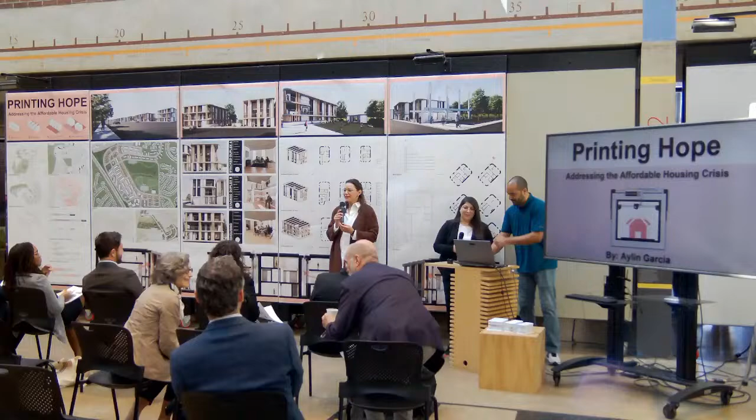We're going to kick off our very first Master of Architecture thesis presentation. We'll be in this room the whole time, flipping between this side and that side. The third student for the morning is on the back of that panel, so once we rotate, we'll be on that side for two presentations. And we're going to introduce our jury. We'll have you guys introduce yourselves because you know better than I do. And then we'll pass it over and kick it off. Does anyone have any questions about the process of the day?

The only, I guess, unexpected component is that Aylin's chair, Marcus, is on Zoom. So at the very end, we'll have a Zoom interlude from Marcus on Zoom. So do you mind starting introducing yourself?

Thank you. Hi, I'm Catherine Anderson. I am a faculty at George Washington University Interior Architecture Design Program. Yes, I'm here actually with my colleague, Stephanie Travis. Hi, I'm Stephanie Travis. I'm program head of interior architecture at GW, and I'm very happy to be here. We've been here for a couple of things over the years and have some friends that are professors, so I'm excited to see the work.

My name is Michael Marshall. I'm an architect in Washington, D.C., have a firm there, and I've been coming to University of Maryland since, I think, 1996. You were here. Yes, for quite a while, and the key professor 1 year. Very excited to see the work. Hi, everyone. I'm Dana McKinney-White. I'm an assistant professor of urban design at the Harvard GSD, and I started my teaching career here at Maryland, so I'm glad to be back.

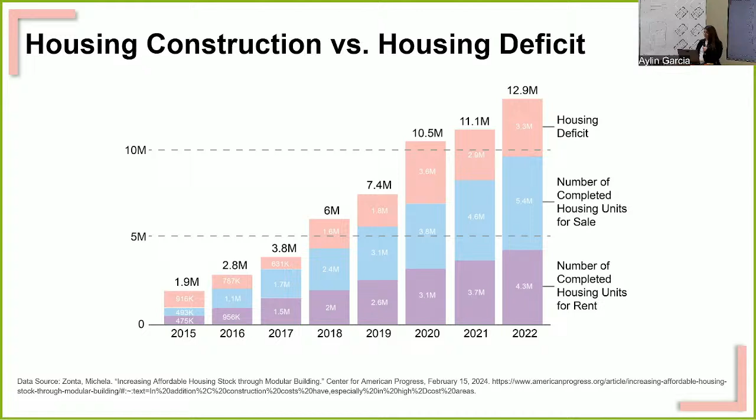This housing shortage has led to an increase in home pricing, creating a decrease in home ownership. Another negative effect is that it creates a burden on renting units, and the government isn't able to assist all the residents in need of affordable housing. Providing affordable housing is a key to reducing intergenerational poverty and increasing economic mobility.

The average time to produce a new residential unit has increased over time, proving that there is a need for another approach to the construction process. The average time it takes to construct one unit is about 10 months; 2 to 19 units, 19 months; and 20 units or more, 21 months.

So for further analysis, looking at the time frame for different construction phases of a single-family 2,500 square foot home, we can see that the construction process phase that takes the longest is the core and shell, due to all the disciplines being involved and relying on one another to move the construction forward.

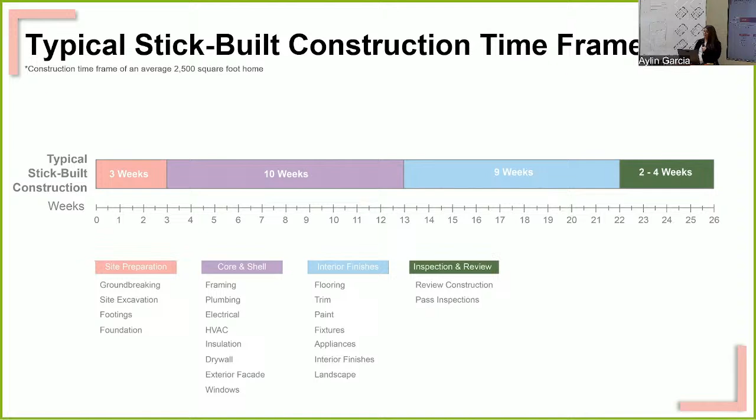But if we look towards 3D printing construction, everything has been coordinated during the core and shell construction. The time frame is reduced significantly to less than a week. So that would help eliminate 9 weeks in the construction process.

Not only is it cheaper to build, but it's also cheaper to operate. From an analysis of the units designed, that will be covered later in the presentation, the EUI of the units allowed for a decrease of 70% of the operation costs, relieving its residents from being cost burdened.

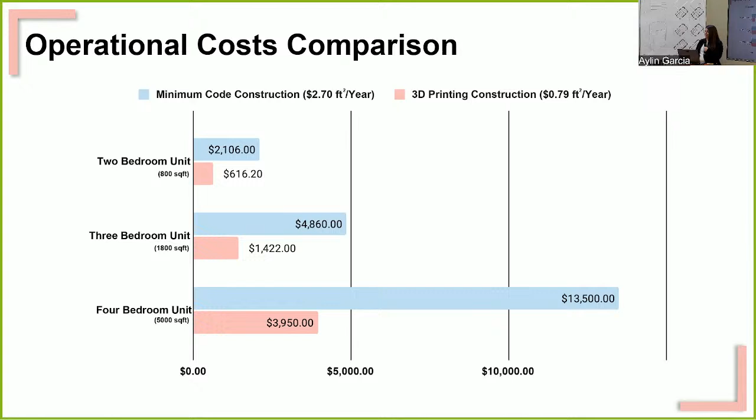So the limits of the current technology are that it requires a 4-foot spacing around the construction of a home, and it's currently only able to print up to 3 stories, but it's still new and it's still advancing to larger sizes.

So the way the 3D printer starts the construction is by pouring the foundation. Then 3 layers of concrete walls are printed together, allowing space for plumbing and electrical to be placed between the walls. And then before placing the precast concrete roof, the walls would be infilled with insulation.

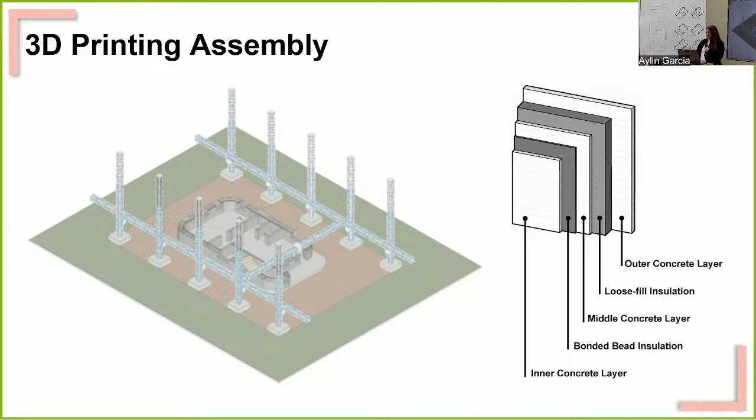Some ways in which 3D printing construction is elevating the standards is by creating resiliency against fires and floods. It has increased strength and lifespan by being able to withstand up to 8.0 magnitude earthquakes. It has a tight building envelope due to the 3 concrete layers and the insulation infilling the layers.

It is very environmentally friendly because the concrete is created with green cement, which reduces emissions by 99%. Finally, it increases natural daylight by having access to windows on all sides of the print due to the constraint.

So this site is located in Greenbelt, Maryland. It's very close to Washington, D.C. and College Park. It is a city that has been growing with a lot of opportunity and is projecting growth over the years. So that's one of the reasons why I chose the site.

But a major reason is because in 1937, Greenbelt was created as one of the first 3 green cities during the New Deal, in which it looked towards new construction methods to keep up with the housing demand. The development consisted of modern modular construction, also found within historic Greenbelt.

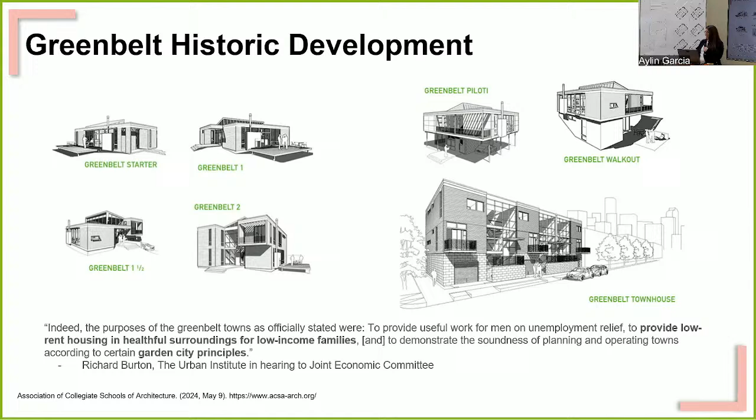Within historic Greenbelt, there's also an Art Deco style, which helps blend nicely with the curves of the 3D printing construction. This was some of the inspiration that led to the contemporary design of the construction. And then these are some values that were created for green cities, which were used for inspiration when designing the spaces, specifically creating connected communities and housing for all.

So as we zoom in to Greenbelt, the city is divided mainly by the highway, which creates a division of sub-communities. On the plan, we can see the site is located in Greenbelt East, and Old Greenbelt is located north of the site, which contains the historic district. To further study how the original development attempted to create a green city, a further analysis is created of the historic district.

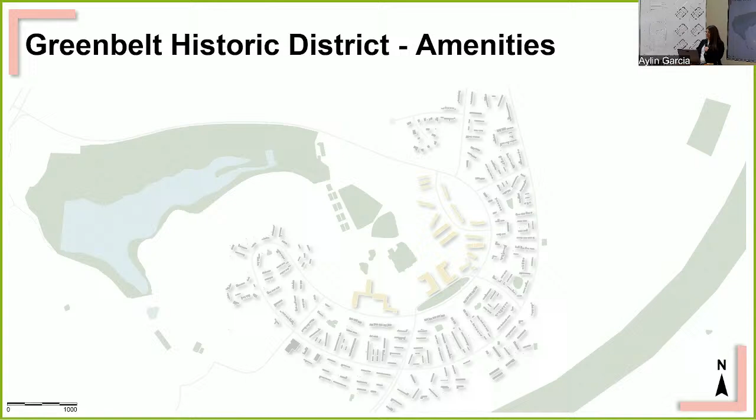So the site is divided into these large super blocks, which are surrounded by all the amenities at the center of the site. The reason for creating the super block was to limit road access and increase pedestrian access, so having an interconnected woven system.

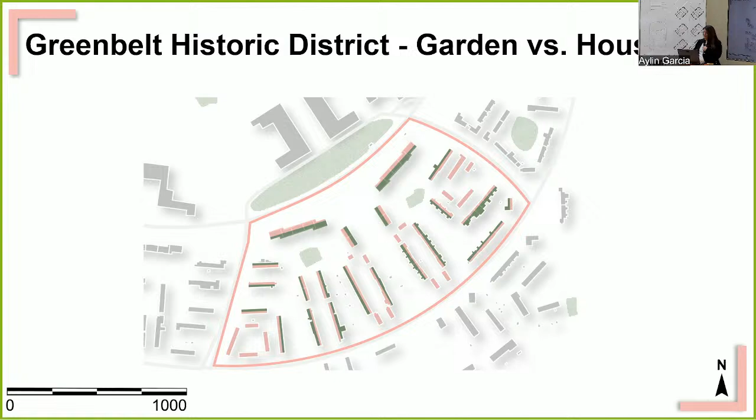And then if we see more of the block, we can see that the housing is divided by an entry side and a garden side. The only issue is that the privacy created between the units is very limited, only having privacy at the garage entrances. So it is also very difficult to implement this type of block sizing into other suburban development areas.

My site is located in Greenbelt East. The site is surrounded by the highway. It is mostly residential with a central park where the community has generated its own community garden. So the community is already looking for more community spaces, as the closest recreational center is located in Old Greenbelt, and the only way to access it is either a 40-minute walk or a bus ride.

It has few amenities on site, which are located north of the park. Surrounding the park, the site was developed between the 1970s and 2010s. However, the development has created a very disconnected Greenbelt East, as some developers have even fenced off the areas of housing, and the ideas of the historic district of creating a connected community are lost.

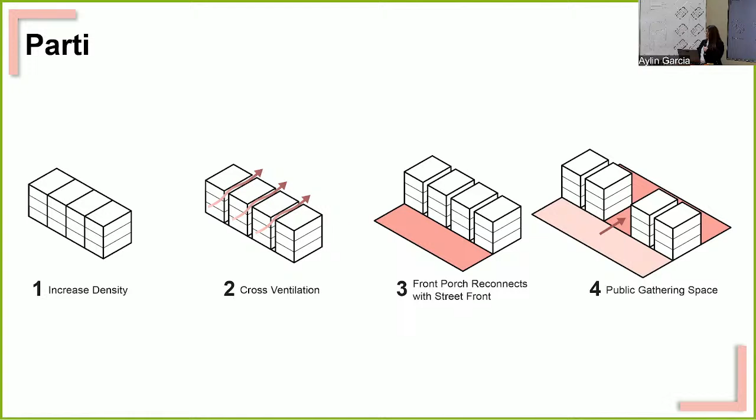To help mitigate this, the first step would be increasing density to create more affordable housing. Second, the 3D printer constraints would allow for more cross ventilation. Third, creating a more public front area that reconnects with the street front. And fourth, creating more community public gathering spaces that don't sacrifice the privacy of its users.

Along the main route within Greenbelt East, there would be a development that reconnects the street with the existing residential buildings while giving back to the community more green spaces and community flexible spaces. There is now a new ring road that wraps around the park, similar to the historic district, where there will be future development of a recreational center that anchors around the existing residential housing.

The development would be divided into 2 phases, in which the first phase starts to reconnect the neighborhoods with new streets, incorporates a park, and continues to create a buffer from the highway. It includes 16 co-housing units and 50 stacked duplex units. The second phase continues reconnecting the streets, creates more housing, and includes a space for a recreational center. This phase has 14 co-housing units and 24 stacked duplex units.

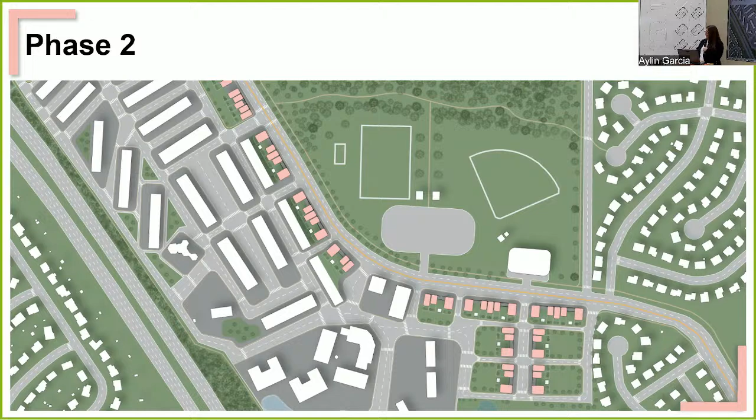So, welcome to the new Greenbelt East development, where there is housing for all, creating an improved green city that has more social opportunities and reconnects with nature. The street front contains new bus stops along the main road in East Greenbelt. All unit blocks have indoor and outdoor flexible spaces, which can be utilized for a makerspace, educational learning space, or recreational space.

The types of units found on site range from 1-bedroom to 3-bedroom and co-housing units. All units include a VRF system for cooling and radiant floors for heating. For the stacked duplexes, an owner would be able to rent the other unit to help decrease housing costs, relieving some of the cost burden of the users. These units also operate using solar panels, reducing cost of operations as stated earlier.

The first floors are 1-bedroom units for each, and for the smaller unit, the upper floors are 2 bedrooms, and for the larger units, it's 3 bedrooms. So the cost to create these units allows for the ability to create more space-friendly units compared to what is existing in the historic district.

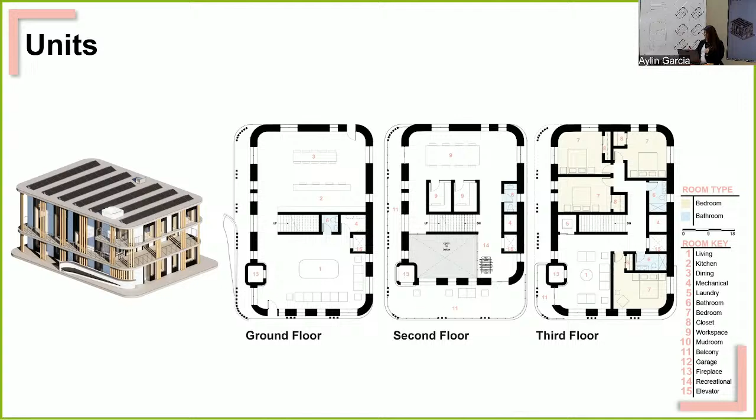So the disconnection between the units allows for more natural light to enter the units. It allows for the reduction in sound transmission, which was a major issue in historic Greenbelt, since the prefabricated homes allowed for a lot of sound transmission. And it allows for an increase of cross-air ventilation, reducing cooling costs.

And to conclude, I say, let's print hope to help create more possibilities for the American dream while creating a more resilient and sustainable future. Thank you for listening to my presentation, and now I open the floor to questions and comments.

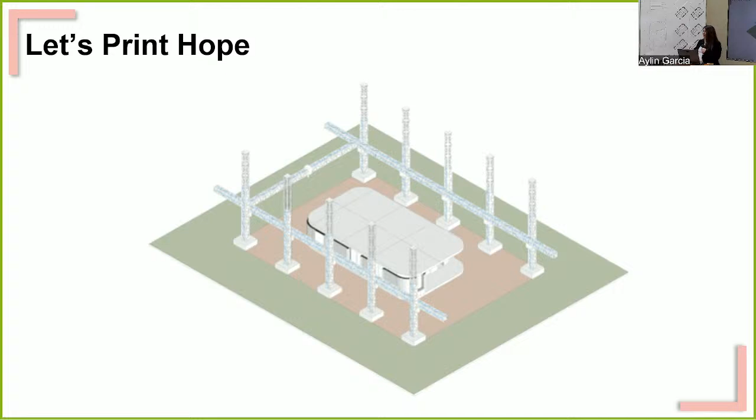Everyone can hear on Zoom. We'll use a mic to ask questions.

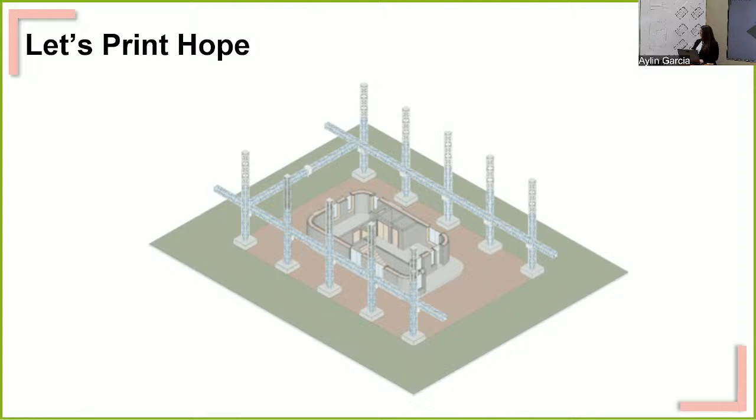Great layout and great presentation. Just a couple questions. The space in between the buildings.

It looks like it's maybe 4 or 5 feet. And so you think the air will be able to come and go through? Yes, so I looked at the air wind flow. And the direction, you mean? Yes, the direction. And since the units are angled, it's able to enter through the sides. Because it's so close together, why not have them touch?

What we call the zero lot line, and maybe wind chimneys or something. It just seems that you're going to have some privacy concerns if the window's open to get the air to go through. It also means acoustically, you'll be able to hear what's going on in your neighbor's house. Did you think about that?

Yes, I agree. The reason why I separated them was because of the 3D printing constraints. At first, I thought of joining them, but the constraint didn't allow for it. But I think as the technology furthers along, it has the possibility of joining those unit blocks and creating more dense unit blocks. Okay.

And you mentioned the difference between regular stick construction and this construction as far as operation. What's included when you look at the data to tell how one is better than the other? I used a software to analyze the sustainability aspect, and it compared the units with the R values and the solar panel production, and it has the standard of a typical stick built, and it compared it to what was being designed. Okay, so your comparison was really mechanical, electrical, plumbing, those things. Correct. Okay, thanks.

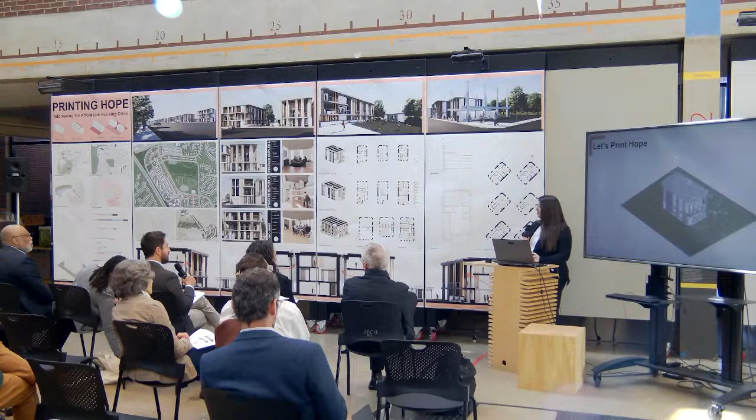Some negative aspects. I think the spacing requirements, like the level constraints, being able to use this technology maybe to even create multifamily developments could further the construction process. Another, I don't think there is another one, but some benefits would be that it reduces the risk of laborers being injured, so it actually helps decrease that risk. But there isn't too much currently since it's a new technology. Thank you.

Yes, thank you for your presentation. I like how you went from general, the urban aspect, down to the wall detail and the structure. I appreciated that a lot. So one of the things, just to pick up on what you just said, but I was thinking about it as you were going through your presentation. It is a new technology, so the time-saving aspect and therefore the economical advantage of these structures is also based on the fact that we need people that know how to construct them and fit them, right? Retrofit them after they've been printed.

How far along are we in that process? We're pretty far along. Even if people feared that this construction process would be eliminating jobs, this would also be generating more jobs because it would need more people to be specialized in using the technology. And even statistically, it's showing that 3D printing construction is going to probably increase by like 50% over the next 5 years.

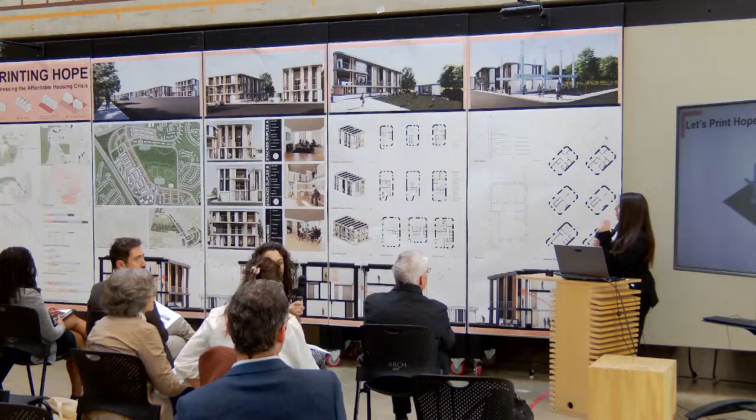I broke up the phases so the first phase would start with co-housing and duplexes, and the third block is mostly stacked duplexes. I think there's more development towards the top of the site and more movement, so it made more sense to start developing in that area. And then, to reduce stress put on residents, as the development would increase, it would start going towards the south of the site.

What in the printing process complicates the idea of having a shared wall between units? So for the printer to actually be set up, there is this 4 foot by 4 foot foundation where the scaffolding is placed. So that is what's not allowing that connection between the units. Yeah, but that foundation could be left buried. You need a foundation wall anyway, right? Footing, foundation.

Yeah, so I don't understand why it wouldn't work. So once that building would be done, it would still require that space for creating the next building. So it would still leave that 4 foot space for creating the next unit next to the existing one. Okay, well, I think there's a way around that, because this would have been a much more sustainable project if you didn't have to have two exterior walls 4 feet apart, where there could have just been the one wall. And so the construction of that other wall is taken away from the cost of the project.

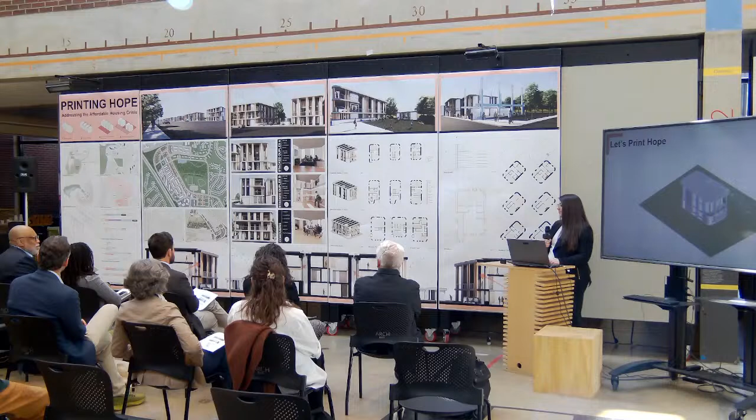Basically, the way row houses are built. So, well, that too. Yeah, that was a whole other issue. So that's just my question. There must be a way, I think, to do that. I think as the technology starts to increase the printing capabilities, it will be able to maybe print 2 to 3 units at a time. So that could help mitigate that aspect. Right. Okay.

I'm looking at that car. You're lucky if you get that one parking spot. But where does everybody else park if you don't have the unit with a garage? There would be street parking along the edge. Right now, currently, there is an extra lane, so it allows for that street parking. Yes, correct. Okay, because I wasn't sure if there's public transport. Along the main road, there's bus stops along the way, so there's 3D printed seating areas to allow for the bus stops.

Really great presentation. I can tell you focused a lot on the architecture and the 3D printing aspects, and it looks like a real resolved project. Not to harp on the 4 foot, 5 foot separation between the buildings, but I think you should also look into, and this maybe is a little too real, fire separation there as well. You've got pretty big openings facing each other. So looking at how to maintain this curved perimeter, but having that party wall just be the single wall between the units, I think would bring it to another level, because I really do like the Art Deco curves, and even the tones are really quite beautiful as a standalone. I think you can drop them into different contexts, and they'll work really nicely.

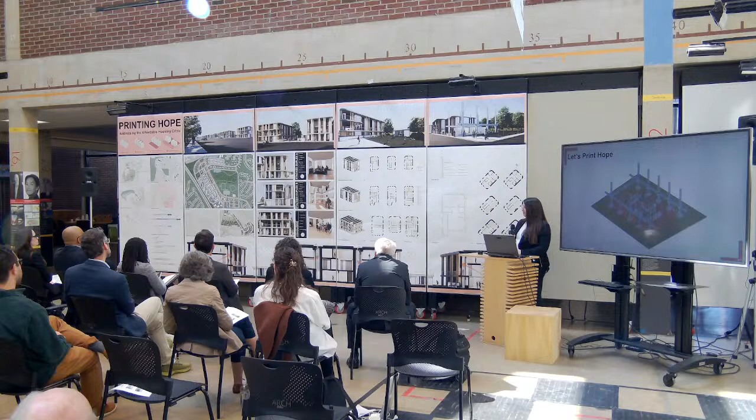I share the concerns about the snugness of the houses to one another. And I think one of the things that probably is true in a community like this is outdoor space for a house would be really important. And if some of the houses maybe were side yard entries where you came up the side yard and entered, it would have solved maybe some of the problems of the proximity issues.

But the project I keep thinking about looking at this is Corbu's project outside Bordeaux, France, when he tried to do mass production there, and the community, after living there for 5 or 10 years, started putting flower boxes on the outside of the houses, and somebody asked Corbu famously, Mr. Architect, they're altering the houses, they're customizing them, and he said, life is always right. We architects must learn from that. Which was, I think, an interesting commentary on how people customize things. So maybe that would be something you'd think about as you move forward in this.

And I think the comments that have been made about the orientation and how you might adapt things to different orientations make sense to me. I think the areas where I have the most concern are where the units back up to those long slab buildings there. They look very, very close there, and the privacy issues are really exacerbated there, I think.

I do think the taxonomy of the type, for it to be successful, as Leon Krier said once, in America, quantity is quality. In other words, if you can do a lot of something, it has great value in the marketplace, and production housing that gets done in America certainly shows us that, because they set up and do 50 houses, and bang, nobody bats an eye.

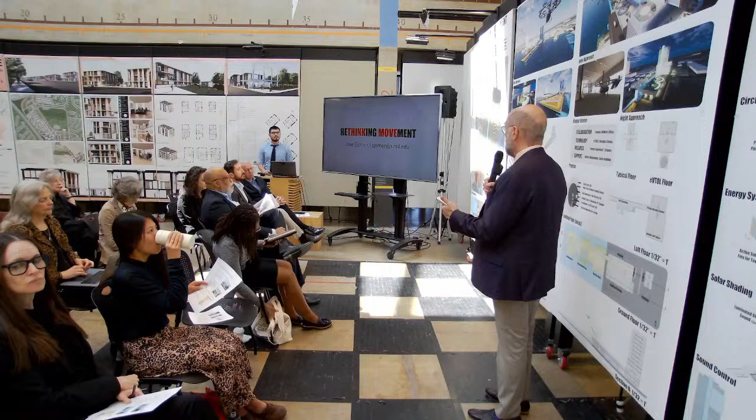All right. And thank you all for joining us. We are, by magic of eVTOL, about to be transported through the air to Baltimore. Jose's thesis chair was Jamie Tillman. The committee was myself and Brittany Williams. You are now clear for takeoff on pad 5. Thank you. Seatbelts? I'm glad to hear that you biked. I'll talk a little bit about that after.

But hi, everyone. My name is Jose Gomez, and I am presenting Rethinking Movement. Before I do present, I do want to give thanks to Professor Kelly and Professor Tillman for helping me throughout this process in taking this concept that doesn't exist into something that could potentially exist in the very near future. So yeah, my name is Jose Gomez, and I'm presenting Rethinking Movement.

In today's world, there's a lot of transportation problems, too many to list in one thesis presentation, but just a couple that are really important. Today, transportation accounts for over 28% of total carbon emissions across various sectors. We've seen since 2020, and even before that, an increasing rise in pedestrian accidents, either at crosswalks or automotive accidents as well. The statistics from 2011 to 2021, I believe the most recent, show over 70,000 accidents that are specifically pedestrian related at crossings.

Another major issue with the transportation realm at the moment is this push into the existing landscape. We're constantly seeing expanding highways and roads taking up natural landscape. These are not necessarily the best for the world we're currently living in. More recently, one of the major issues is the collapse of the Francis Scott Key Bridge. It has shown that current transportation networks are rather fragile, and they affect not just the infrastructure itself, but multiple sectors that depend on transportation to move goods and people.

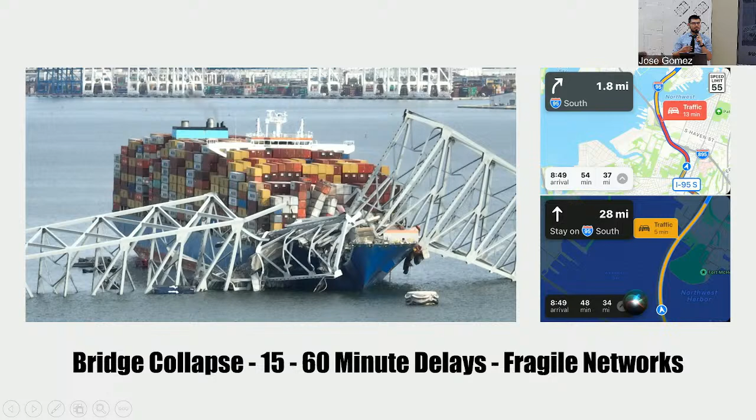I myself, and some of you might have experienced this yourself, specifically during rush hours, will find anywhere from 15 to 60 or more minutes added to your commute if you're traveling through the tunnels along I-95. And so this recent accident has really shown that another eye needs to be taken into account when looking at the transportation realm. So what if we start to change the way that we're looking at transportation? Today, there's a variety of new technologies starting to incorporate themselves into our current transportation networks.

Some of those include electric power. Multiple vehicles are starting to incorporate electric batteries as the main source for energy to move the vehicle instead of traditional fossil fuels. Aerial flight is one of the booming sectors in the world right now, where we're starting to see drones and eVTOLs, which stands for electric vertical takeoff and landing vehicles. Another term that you might have heard in the past is air taxis. It applies to those as well.

And more recent as well are new autonomous systems. These systems are designed to help automate these processes to take people from one place to another or goods from one place to another without the need of a person to actually move these vehicles. What if we take those technologies and incorporate them into a new mode that's faster to travel, that incorporates a brand new network and changes that experience?

Traditionally, as we've mentioned, the transportation realm is flooded with carbon emissions. It has almost this negative view that you might even experience when you go to a typical gas station. Our current transportation networks are limited to ground-based for the majority of our day-to-day lives, that being highway use, smaller roads, and even rail as well. But if we take all of those categories and change it a little bit to make our experience better, but not just the experience, our day-to-day lives better, it can create a new network that starts to incorporate this aerial technology and starts to populate new areas.

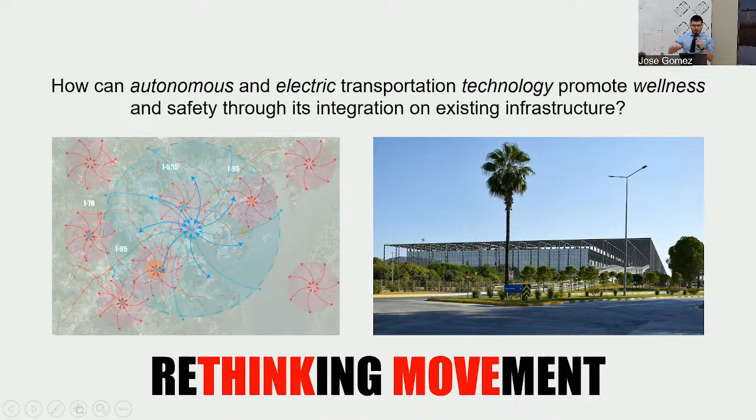And so the thesis question that I've been working with for this semester was, how can autonomous and electric transportation technology promote both wellness and safety through its integration on existing infrastructure? I mentioned that the eVTOLs, which are starting to appear nowadays, are electric powered, and they can carry both people and goods to any place that they can land. The advantages of these vehicles are, one, being electric powered, they don't have carbon emissions, and two, because they are not restricted by the traditional transportation networks, those being ground-based on a two-dimensional plane, they can move faster, more efficiently, and they can get to a place quicker, safer.

These vehicles are starting to appear as we're speaking now. They're continuously being developed by multiple companies, and we will be seeing these in the near future. In fact, there's this program called Innovate 28 that's created by the Federal Aviation Administration, which is the sole organization that's regulating the development of eVTOLs and this concept known as advanced air mobility, which incorporates both these eVTOLs as well as smaller drones and the general landscape of aerial vehicles for the future. Their goal is to have these vehicles up and running at facilities by 2028. So this technology is coming.

However, one of the things that they are missing at this point in time is an infrastructure to be able to accommodate them. In the way a bus has a bus station or a train has a train station, these eVTOLs need some kind of station to be able to operate, to be maintained and to serve as multiple stops and start to populate this new network. And so that introduces the vertiport concept, which is this new infrastructure that allows for a multimodal access point where one can transition from ground-based transportation into aerial-based transportation.

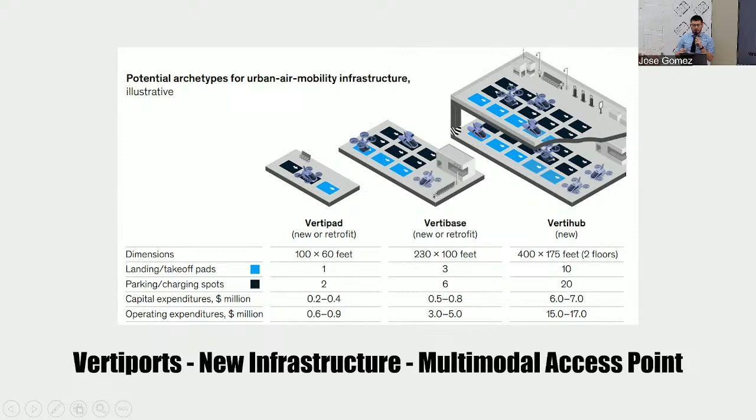And so as we zoom into the site that I have selected for this project, we see that the vertiport, in a sense, isn't necessarily new. Rather, it's the evolution of the current heliport. The site that I've selected is in Canton, Baltimore, specifically the industrial site. You can see this site right before you go into the tunnels. It's called the Pier 7 heliport, which can be accessed directly from I-95 as well as through the Chesapeake Bay. This site currently serves as a heliport. The pier that extends out into the water can hold up to 7 helicopters for deployment.

However, the entire area being an industrial site has very little public realm to it. Granted, it is for the industry to work. However, it's missing a little piece of public appeal. And so I present today the Baltimore Vertiport, which is an evolution of this existing heliport.

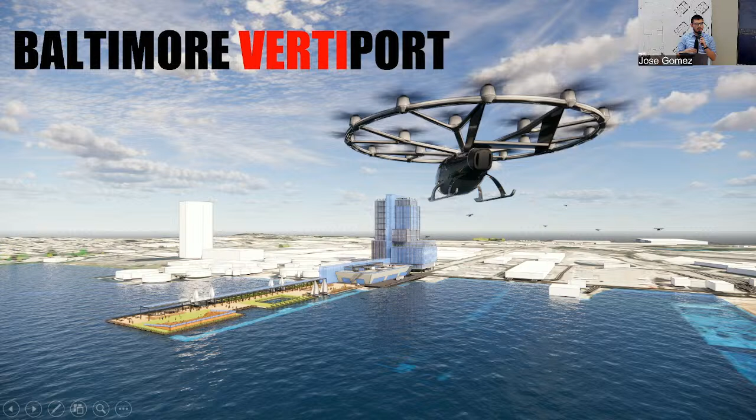The vertiport is both a tech-focused hangar on one side with a collaborative tower on a site just across the street, and it is combined by this experiential spine that extends from the top of the tower down to the existing pier. The purpose of this project is to both preserve the pier and repurpose it. Instead of it being the mode for transportation, it now becomes a place for people.

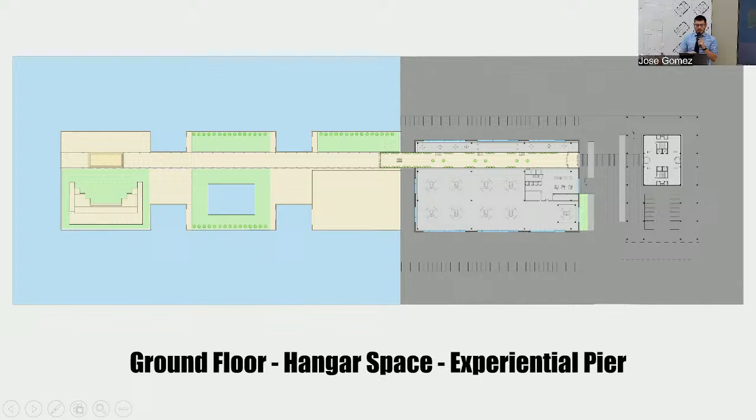The vehicles move themselves onto the actual vertiport itself, and it starts to create this new vertical experience, not just in the actual movement of people through the vehicles, but in the actual building itself. So the ground floor, as I mentioned, consists of both the pier that extends onto the water, which has now been extended to accommodate various programs, a hangar,

if we can get the laser, a hangar portion, which houses the technical aspect of the project, that being the eVTOLs themselves. The hangar takes care of charging necessities, as well as, on the upper floor, the actual landing and takeoff of these vehicles, and a tower that on the ground level is more focused on the connection between vehicle to person entry.

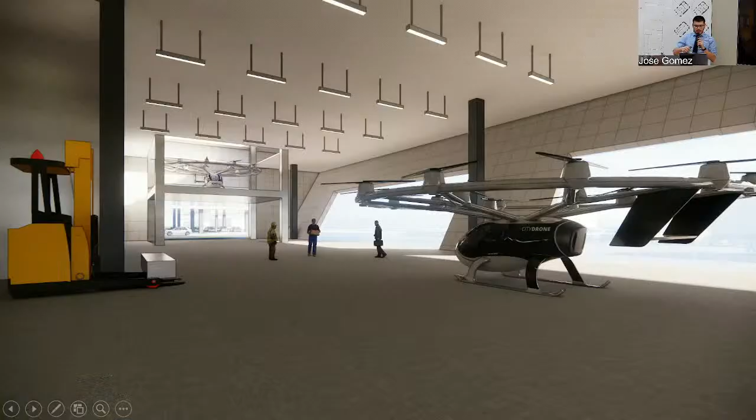And so a couple of views to kind of describe this experience. As one drives into this area, the first thing you'll notice is the connection between the pier, which has a spine running through the hangar up towards the tower. The hangar itself, which accommodates the eVTOLs, is, as I mentioned, focused on the technological aspect of the project, this being charging, loading and unloading of goods, and general maintenance for these vehicles.

And out on the pier, that has now been transformed from a traditional helicopter landing spot, it's now become a place for people to gather and a place for people to start to incorporate multimodal aspects to it. So now you can use the pier not just for the traditional helicopters, but to incorporate water-based travel.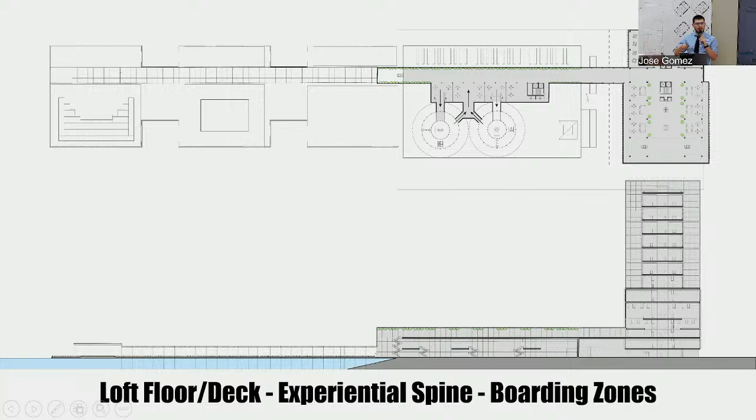As we move a level up onto that experiential spine, we come to the areas where we'll have our boarding tunnels, highlighted in red over there, and this unique loft space up on the tower portion. The spine leads directly into the tunnels for the boarding of these vehicles themselves.

And the idea here is to start to change the experience of walking through a building. It starts to bring a little bit of the exterior into the interior with the addition of green walls and glazing to make you feel like you're outside. As you approach one of the eVTOLs, you can come in through these extendable canopies that come out almost over to the vehicle to help provide some cover depending on different weather conditions.

And on that upper loft level, which has multiple floors, this is the loft level, which has a couple mezzanines up there. The upper portions of it are more for the publicity of these vehicles, to help promote this technology and these vehicles.

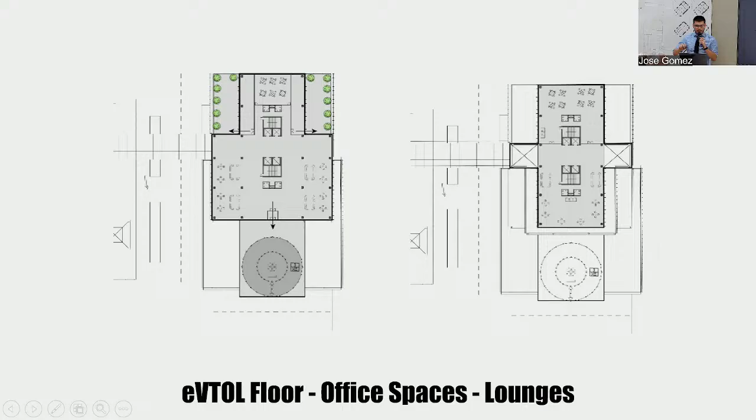As we move up on the tower, we have another landing spot above that offers direct access to the other programs in the building, which are specifically different lounges as well as WeWork and office spaces to help make this a collaborative space. And the subsequent floors, or the typical floors, are also mainly focused on office spaces. So what this helps provide is this direct access from vehicle to work areas.

One can, in a sense, experience this express mode of mobility to be able to get from one place to another and almost bypass the traditional waiting times of airports.

At the top of this experiential tower is this almost 360 view that one gets of the city, to help enforce that vertical experience that the tower provides and help connect you with the environment around. At the top, you can see the entirety of the Baltimore Harbor, as well as, not presented in this view, the rear, which is a more industrial area.

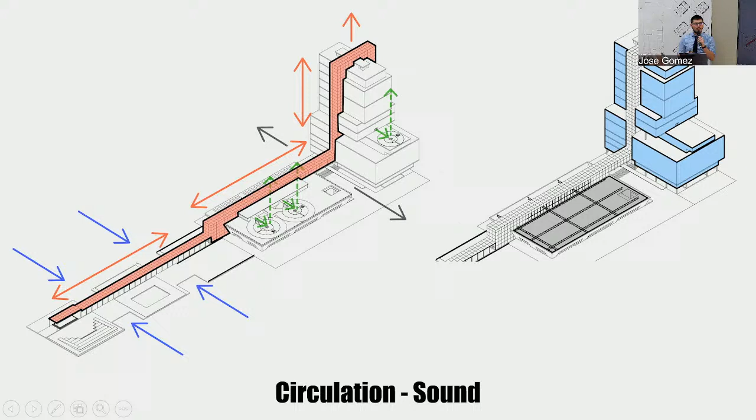And so, to recap, the Baltimore Vertiport has this spine that serves as the datum line for circulation, which extends from the pier all the way up into the tower. In a sense, it brings the water all the way up to the sky. It's almost symbolic in bringing all of these modes of transportation and pushing them towards the future, which is aerial mobility. One of the issues that come with the implementation of this technology is mitigating sound.

And so to do that, the tower uses acoustic glass, while the hangar itself uses fiberglass panels to help mitigate sound. With the introduction of these vehicles, it's necessary to incorporate energy and shading devices. This tower has shading fins to help with the sun shading overall. And for energy, I apologize, this is the incorrect diagram. I am pointing on the fourth board.

Here we go. The entire spine is made of photovoltaic glass, which helps bring in energy to help charge these vehicles that they will be servicing. And the structure itself consists of various depths of columns. The tower itself is mostly made of beams, while the hangar is made up of multiple trusses to help carry the heavier loads that these vehicles bring on.

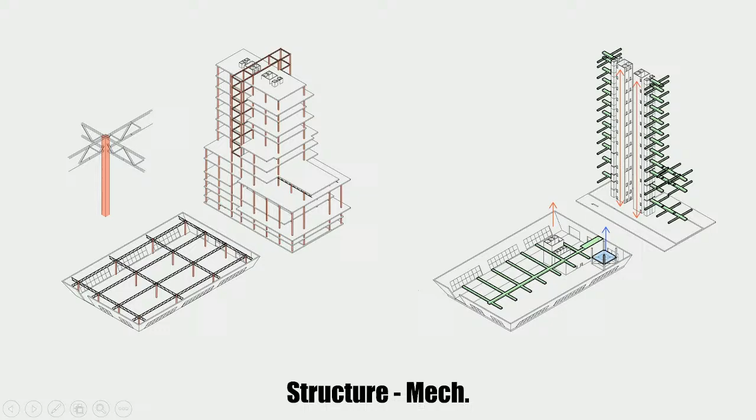And so to recap, this new vertiport creates a new node in Baltimore, which helps create a new network that can start to expand out into various areas. It can offer new connections to BWI to various cities around, and these vehicles themselves can start to create smaller networks at different scales.

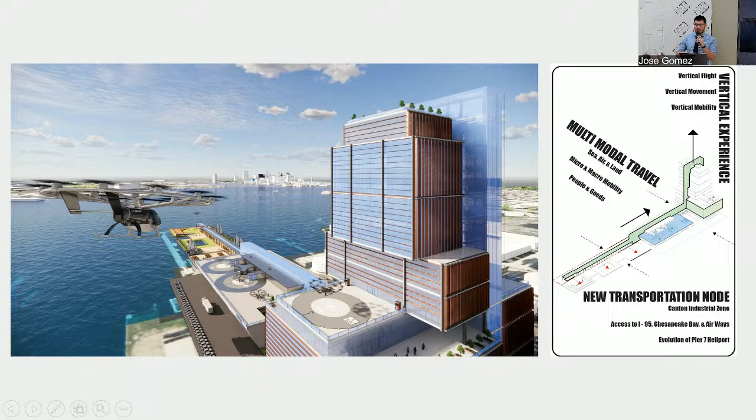In essence, the Baltimore Vertiport starts to push this idea of a vertical experience, this multimodal form of travel, and this new node with multiple access points to both ground-based travel, water-based travel, and air travel. And that concludes my presentation. Thank you.

The critics are now cleared for an opportunity to talk, and I hold the implement of critique for whoever would like to use it. Make sure you do use it, though.

Sure. I just have a question about the vehicles. Are there any plans for bus-size vehicles? Because right now this is kind of private and 4 or 5 people, you know, to leverage this so that it makes sense financially. Yeah, so I've done a lot of research on vehicles. I hate to admit it, sometimes even more than the architectural aspect. I really like this technology.

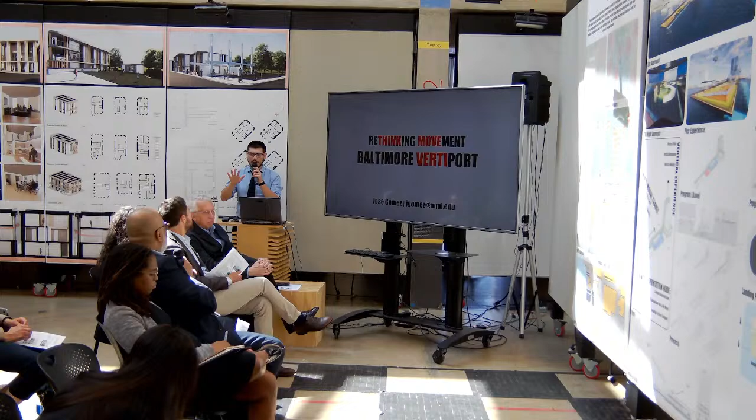Just looking at the industry and the development of the technology at the moment, it is brand new, so it's still smaller scale. From the vehicles that I have seen, I think one of them has a max of around 6, so it's starting to push a little bit more maybe to what a van would be like. The majority, though, are from 2 to 4 people, including or in addition to a pilot, so around 5 people, which would be equivalent to like a taxi driver and 4 other passengers. The technology is still a little bit newer, though. I'm sure this costs a lot more than a taxi cab.

Yes, I meant more in terms of like people occupancy. Yeah. No, but I'm just saying to get the return on investment. Sorry, getting real world stuff, but it just seems like this would be an incredible investment for like in New York, where they have the heliport, like you said. It's really for really rich people to get out to the Hamptons or wherever, and it's expensive. So I would just say maybe you've oversized it, you know, for the use for the limited number of people.

I mean, the architecture is great. It's like now you have to go back and make sure they make a vehicle big enough to get the return on investment with the number of people to make it more democratic, if you will. Gotcha. Like a bus stop, you know, and the number of people that can take a bus versus, and that's why people take buses sometimes instead of taxis, because it's more economic. So I just think that's your next thing you should look at.

Coming down 95, I've always wondered what that brick tower was and why it was there. And now getting a better understanding of seeing this location, and certainly the notion of helicopters and the like and the noise that they generate suggests that perhaps center of city is an issue. But seemingly from an urban perspective and being able to get to downtown Baltimore, this seems pretty distended from that. And I'm struggling with the quantity of people that would ever come here to activate all the public space you have with this pier. And the pier being complicated as an outdoor space with the noise.

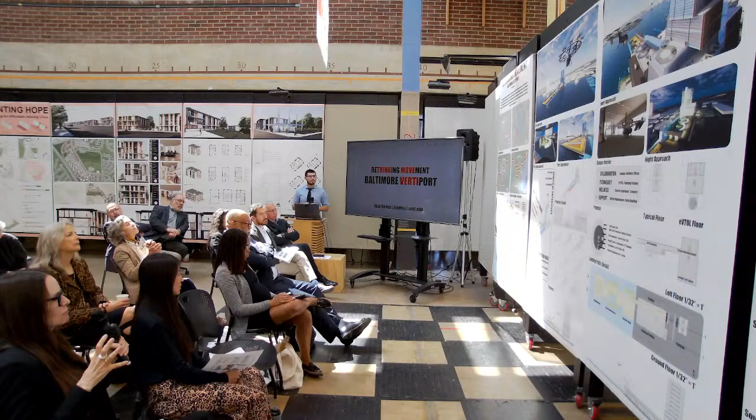And then when you get there, and it probably wasn't the largest part of your project, but I think it's a bit static. In the recreational area, there's this huge water element, but there's water everywhere around, so it's not really necessary to have that there. It perhaps could be a great place for a sculpture garden or incorporating local artists in Baltimore. The amphitheater is also quite large and static, and I imagine there would want to be some flexibility with smaller events. And if you're bringing everyone out there, there needs to be some sort of restroom facility because it is a bit isolated.

I want to hear a little bit more about that experience. You talked about a green wall, and I'm not sure where that is. There does seem to be some greenery as you're walking through. But once you get through and you're at that opening, which I understand is the spine opening up, it looks like pretty standard columns. I wonder what your intent was for that experience? Is there more, now that you've had a chance to look back, that you could do to create that long experience? How many feet is that from end to end?

Is end to end being out on the pier or also including the building? Yeah, if you're coming from land and you want to go see something at the amphitheater. I believe it's roughly 300 feet. Yeah, that would be 300 feet.

Regarding your first comment about the program for the pier, one of the ideas for that recreational area and having that enclosed water was that this technology is developing and it's not limited to just aerial-based mobility. We've seen with the recent events of the Key Bridge how we can also start to improve water-based travel. So the idea with having that enclosed water space is a testing ground for water-based drones, smaller boats that people can come in and test, at a funner scale. I can imagine people coming here with their children, maybe with their little toy boats, using this space to engage with the vertiport.

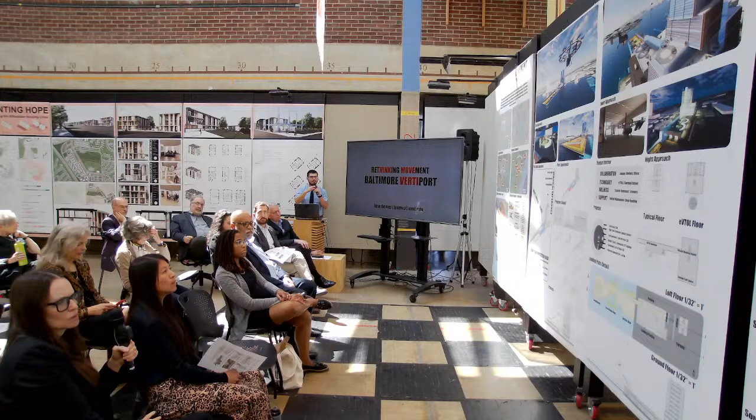One of the reasons for that, obviously this vertiport, the original thinking of it was kind of a deviation or a derivative from kind of an airport-like program. And I imagine as the technology improves, these vehicles will become quicker, but people are still going to want to see and experience this technology. And so having those open spaces more towards the south so that they're actually aligned with the hangar pads itself kind of gives that visual connection with both the pier and the activity of the vehicles themselves.

Right. So the public spaces are the lighter blue. That's sort of delineating the lounges. Correct. Yes. Yeah. Because I was wondering the sort of the exterior fenestration, the design, where that came from. I get the slice through, but as far as the other parts of the tower, was there a design? What drove that design with the verticals versus the horizontals?

Sure. So I looked a lot into projects that start to deal with some of this. One of the projects and kind of the general ideas that I got was from Norman Foster, that design style where it starts to push some of the programmatic elements out a little bit. And so some of these larger loft spaces, they start to protrude from the general core of the tower, as we can see in, sorry, I'm trying to find the laser. Here we go. So this one obviously starts to protrude both out to create that loft space with that visual connection to the VTOLs, but as well as provide another VTOL landing up top.

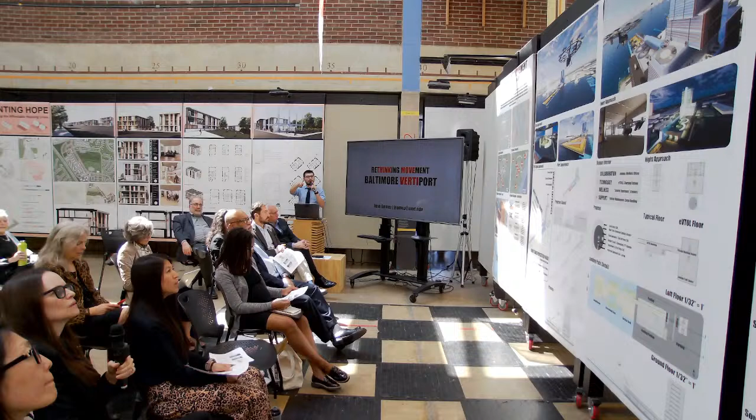The second portion, if I can find the laser again. There we go. Yes, I can do that. I forgot I have legs.

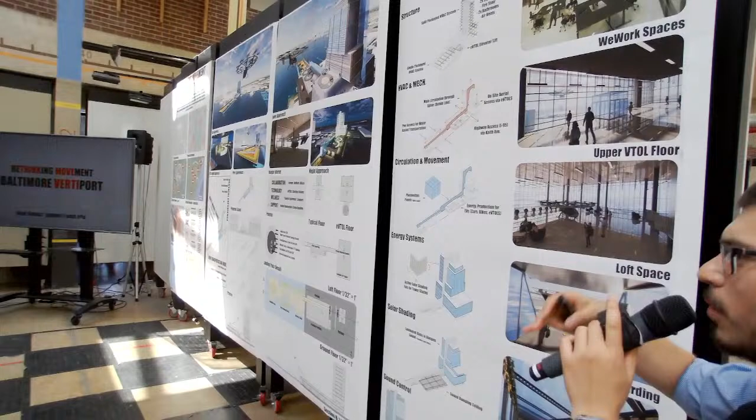Yeah, so some of these spaces start to protrude a little bit out, both for also that visual connection down onto the space below, but also in some of these spaces, they can start to become larger event spaces or even be repurposed for the exhibition of some of these vehicles as well. I mentioned kind of this concept is having this vertical experience, and so bringing them higher up, having that sense of height in the city is really important for this project. And so having those pushes and pulls to kind of delineate these spaces for overall views was important for me.

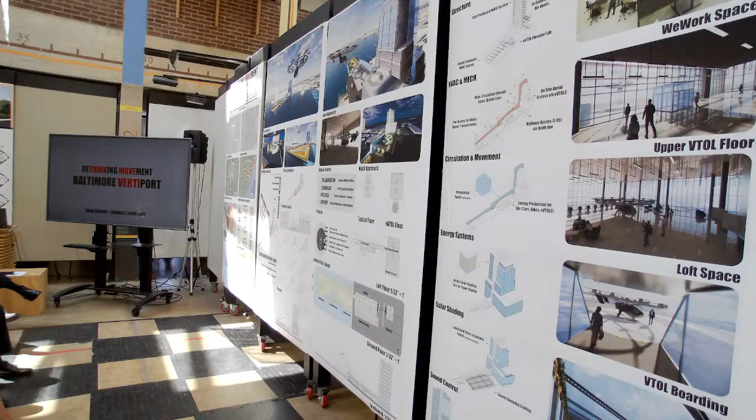Yeah, I think maybe it could be pushed just a bit more to really add more dimension, and maybe there are outdoor spaces that give more depth to the facade. I think that's what somebody mentioned, like it's looking a little like an office park, just a very massive building. I think you really started with the hierarchy of the spaces and shifting, but maybe just push that a little bit more to have a little bit more visual interest there. I like the idea of the space.

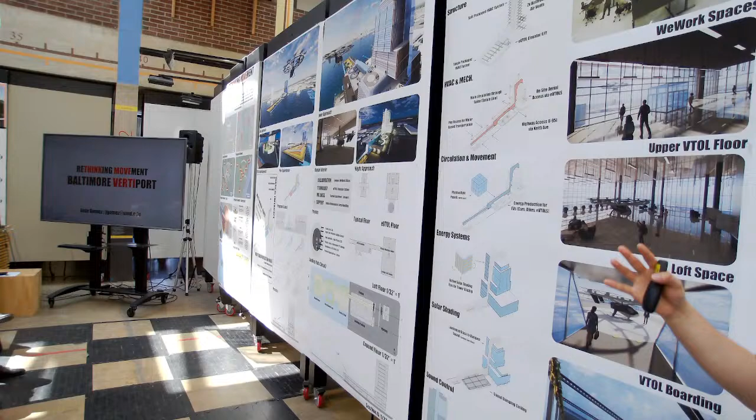Sorry, before I do forget, also one of the concepts of pushing the building off to the side: when I originally thought of aerial technology for this, the thing that immediately came to my mind was aircraft carriers, and both the design, kind of the slope of the hangar, but as well as pushing the tower almost to the side. It's a common trait, and so it's a little reminiscent of the nautical experience of the aircraft carriers, and representing that in the building massing as a whole. No, I do appreciate that it's not sliced in the center. So it's a really nice job.

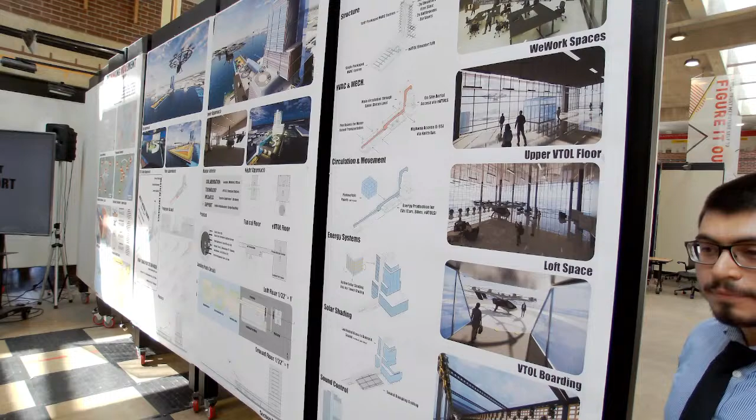I'm glad I'm young enough to be able to maybe wait for this technology to actually occur. 2028. That's what I'm saying. I can't believe it. I can get rid of my driver's license soon.

So I really commend you on taking on such a massive scope. I think sometimes we get almost too ambitious, right? But it's better to just go for it, right? I think when I heard about your fascination with these technologies and these kinds of ways of transportation, it struck me that yes, you are really in love with these, which is fine, which is great, right?

But I think what starts to get missed is sometimes the human experience, right? And so trying to toggle between these two massive scales, right? The one is like enormous, right? These machines that we don't really have spaces for per se, right? And then the human experience. And so it's really interesting that when you show these images, I feel almost overwhelmed, right, in these spaces. And so I wish you had just embraced that.

Let me just design something that really hasn't been designed before properly, right? And that's what you're taking on. You're taking on a whole new building type that really doesn't exist. And I think capturing that imagination, I almost feel like you got a little bit bogged down with, I gotta make spaces to justify the verticality. Just make a tower, right? Just say the hell with people. I'm just gonna make a tower. You know what I'm saying, right?

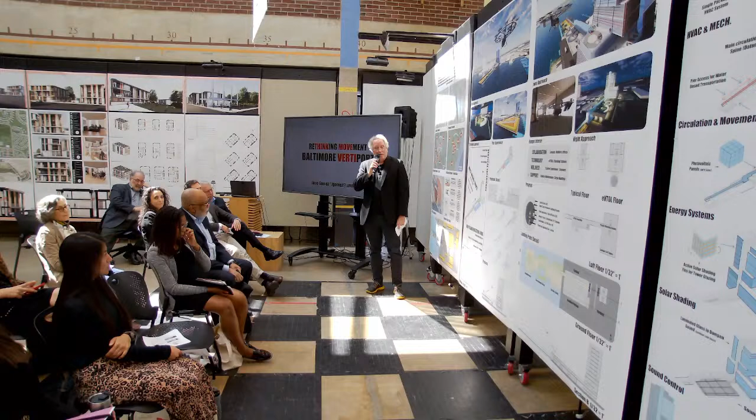And so I'm a fan of Giacomo Balla and Umberto Boccioni and the futurists. And if you think about Sant'Elia's famous drawings of the integration of different modes of transportation, they are, to me, and I hadn't thought about this before, a little bit reminiscent of your interest in integrating these modes. I do think you're successfully bringing the public into this conversation. And as the technology gets more efficient, I think some of the social and commercial issues will begin to fall into a useful category. So I want to congratulate you on embracing this, and I look forward to your trajectory moving forward. So congratulations.

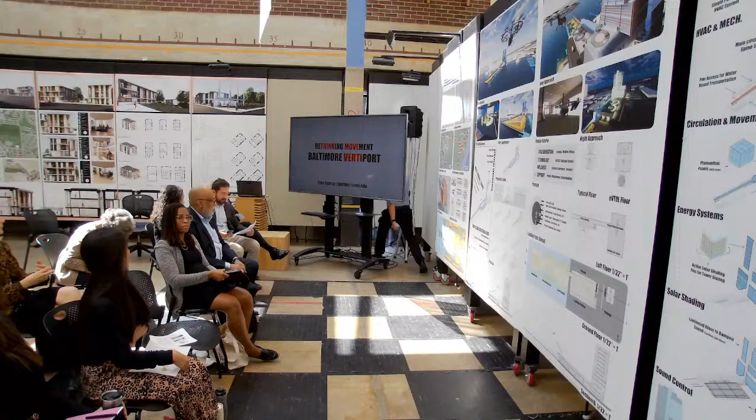You can take your seatbelts off now. We've moved into the gate. You can get up and move around for a couple seconds. We have to reposition these panels so that the next student can present. And if we could get some help from the thesis press corps over there to assist your colleague to do that, that would be greatly appreciated. We want the best one.

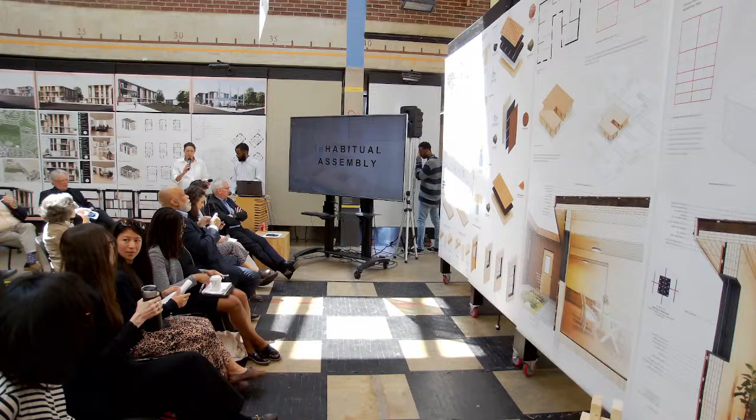Hello, everyone. My name is Abdureuf Hussien, and this is my thesis, Inhabitual Assembly. The thesis looks into how we can utilize prefabricated wood construction assemblies to provide sustainable homes across the United States. It seeks to take advantage of timber as a building material in combination with subtractive manufacturing to produce sustainable assemblies that have minimal impact on the environment. Timber is an advantageous material as carbon stocks have been increasing within the United States, and it holds great sustainable qualities like carbon sequestration. And when combined with subtractive manufacturing, it has a great deal of capabilities.

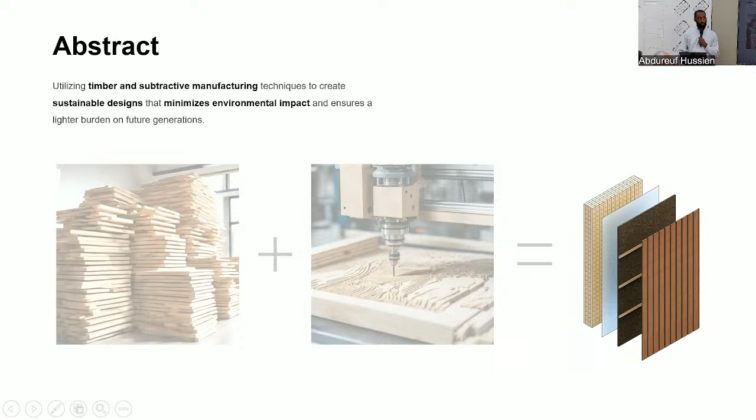Much of this exploration is in response to conventional methods, which are not robust when it comes to sustainability and are heavily reliant upon synthetic materials. For example, the use of polystyrene foam insulation, as well as polyethylene vapor barriers, as well as the use of synthetic sealants and adhesives for plywood sheathing. All of this together has adverse effects on the environment.

One of the important aspects of this exploration is evidently the CNC machine. And for the CNC machine, one of its important parameters is the bed sizing. The bed sizing can vary from machine to machine, but generally speaking, it usually is 4 by 8 feet. And the depth itself can vary quite a bit, but is generally around 8 to 10 inches.

Another important parameter is the machining parameters, which are defined by the speed and the feed rate. The speed is the rate at which it moves in the X and Y direction, and the feed rate is the rate at which it drills into the material. These are important to mention as linear cuts, both in the X and Y direction, are the most efficient alongside the machine drilling into the material vertically.

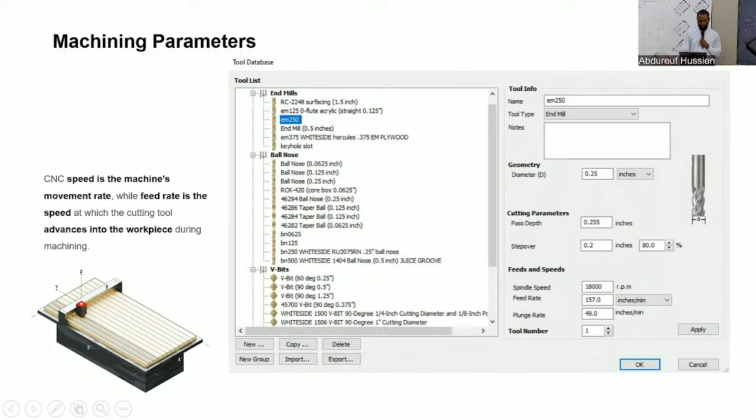One of the great benefits of using this technology with timber is the ability to standardize some of the essential construction elements, which leads to high volume production. Prefabrication in general is quite efficient in terms of time. It takes about 30% of conventional construction time. It also provides us the opportunity to integrate complex custom joints. This allows us to create structures that are usually reserved for concrete and steel, which are energy intensive, and makes timber a viable alternative.

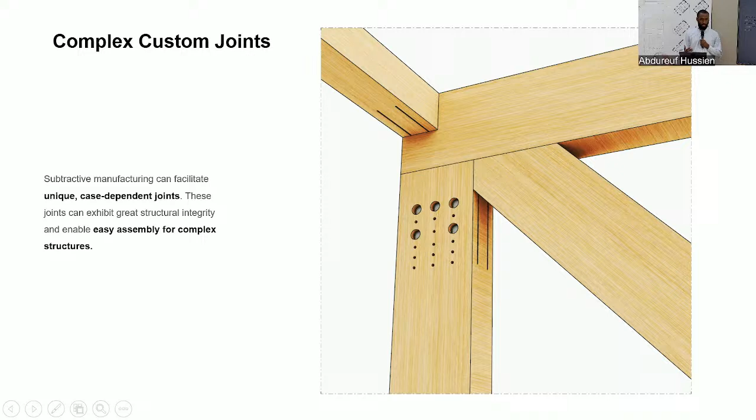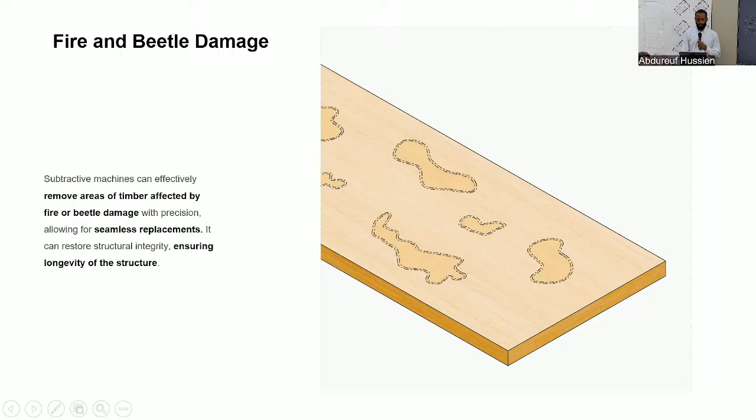Another advantage of this technology is the integration of all wood joinery. There was a study done in Hamburg, Germany, where they found that they were able to reduce thermal conductance by 30% by integrating all wood joinery. And so it provides great opportunities for improving air tightness. It also provides the opportunity to use wood that has been damaged, the ability to replace fire and beetle damage as well.

And one of the important advantages to this technology is the ability to integrate wood connectors, where we can use high friction openings to integrate wood connectors such as dowels and screws, and minimize, in some cases eliminate, the need for synthetic sealants and adhesives. Similarly, we can use lamella profiles, where we take strips of wood, inexpensive strips of wood, and use precision joints to put them together to make robust assemblies.

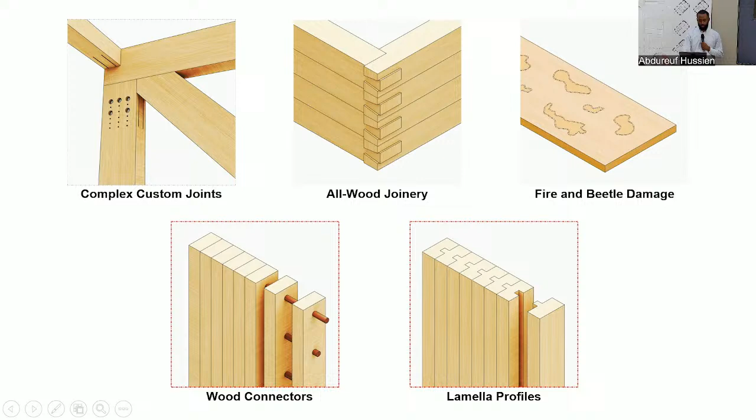In terms of where this thesis lands in this conversation, it's mainly focused on taking advantage of using wood connectors as well as lamella profiles to create sustainable assemblies. The project is siteless, and its main parameter is working within climate zone 4 and adhering to different requirements, including the R values. Another element that contextualizes this project is the material, which is loblolly pine. In terms of sustainable harvesting within the Southeast United States, it's the one that is readily available to us.

And additionally, it has great qualities. Pine alongside spruce and cedar was rated as one of the most airtight species by the Department of Energy. And one of its great advantages, for instance, is for each inch of this material, it has an R value of around 1.4. So it is quite advantageous when it comes to the assemblies.

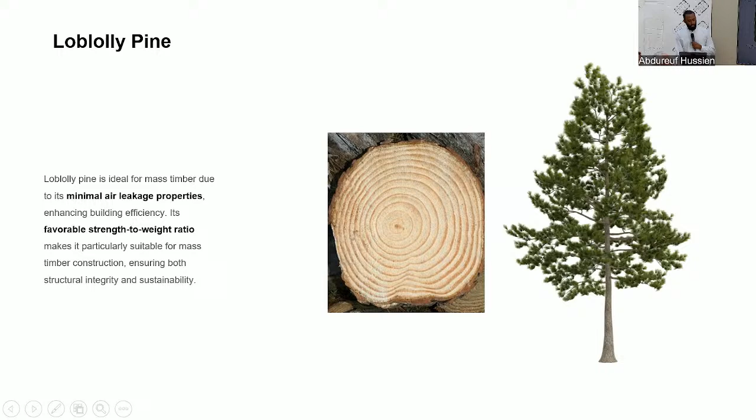When we come into the design, the wall panels are made up of cross-stacked dowel laminated timber. As I mentioned earlier, the bed sizing plays an important role in terms of these panel sizes. Each of these is around 4 by 8, similar to the CNC bed size. For the exterior load-bearing walls, I use 5-ply cross-stacked dowel laminated timber, and then for the interior partition walls, I use single-stacked dowel laminated timber with 2 by 6 horizontal bracing.

In terms of the assembly, the loblolly pine is made up of 2 by 4 pieces of wood, in which the CNC cuts openings equidistant from each other. And these openings are fitted with 3/4 of an inch hardwood dowels, which have a different expansion rate than the softwood, which is the pine. These openings are actually 0.74 inches instead of 0.75. These allow for a very tight fit to the assembly and minimize the need for synthetic adhesives.

An important factor to all of this is the weight of these panels. Depending on the typology we're working with or transportation needs, we can utilize these smaller sizes. So we can use a 2 by 8, a 4 by 4, as well as a 2 by 4. These would merely require more connections, but still would be as effective as the 4 by 8 panel. An essential component to these panels is the connectors, which are essential to the assembly.

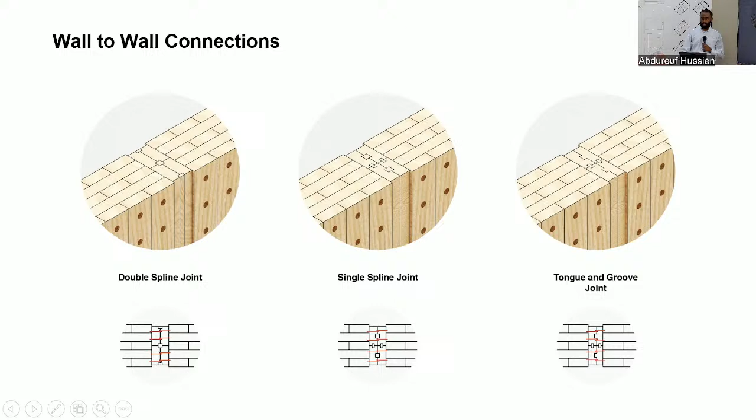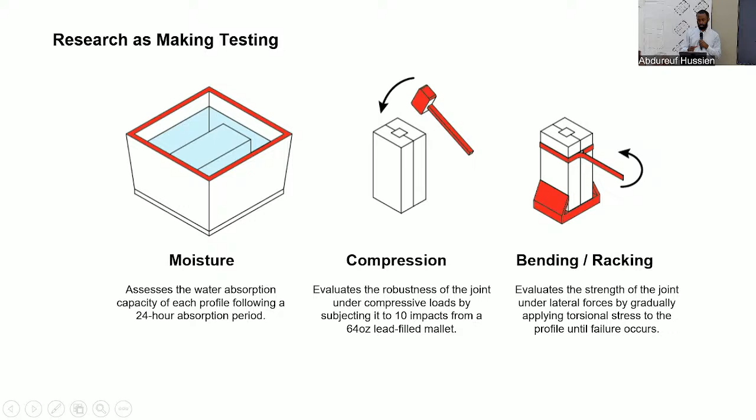To test the merit of each of these joints, I isolated each of them and cut them via the CNC and conducted 3 tests. One of these tests was the moisture test, in which each of these profiles were submerged in water for 24 hours. There's also the compression test, in which they were subjected to 10 consecutive hits with a 64-ounce mallet to see where the loads were being distributed, as well as the bending and racking test, where they had stress applied to them to see how they react to lateral forces and where the weak points are, where they break.

For the moisture test, they were submerged in water, as mentioned, for 24 hours, and the volume was measured before and after. The double spline performed the worst, with a 4.86% increase. The single spline with a 3.67, and the tongue and groove with a 3.57. So the 2 performed quite well.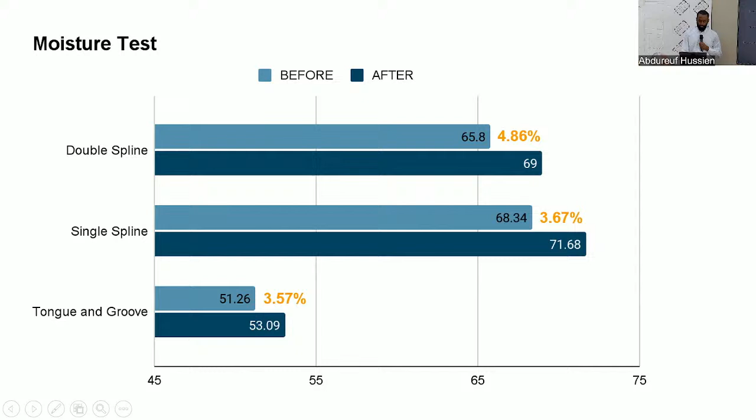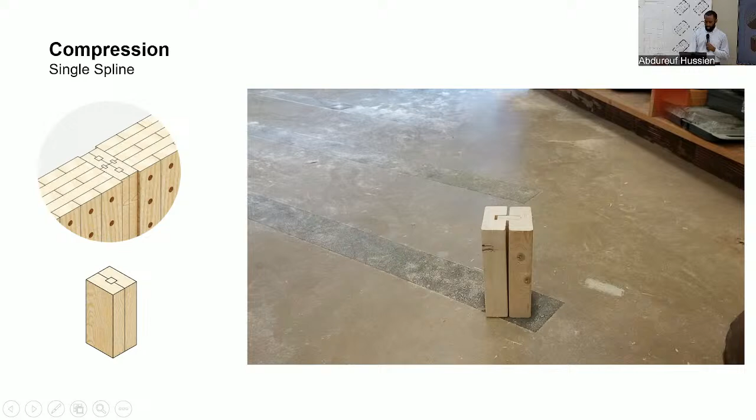When we move towards the single spline, the same test where they're just being hit by a 64-ounce mallet, we see that it starts to come apart. But this is actually quite advantageous as we look at where these forces are going. Instead of going outward, they're going into the mass timber wall, which will take up much of the load instead of subjecting each of these profiles to the compressive forces.

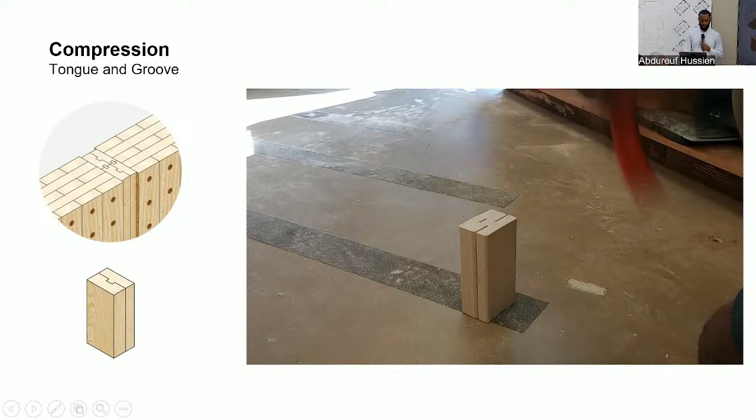The tongue and groove performed similarly, in fact, better. It held out longer than the single spline, and similarly, the forces were being distributed towards the mass timber walls. And so, as I mentioned earlier, similar to the single spline, but more effective.

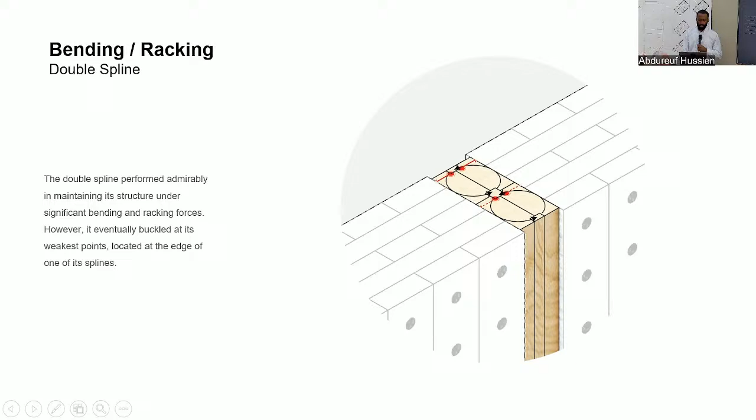And this is the bending and racking test. This is for the double spline. So the weak points you see are the points nearest to me there. And as I subject more force to them, those 2 points at the end over here start to give out. And they held out quite well compared to the rest, but once those points yielded, they yielded quite instantaneously. So it had 2 primary weak points over here and 2 secondary ones over here, but it was quite robust.

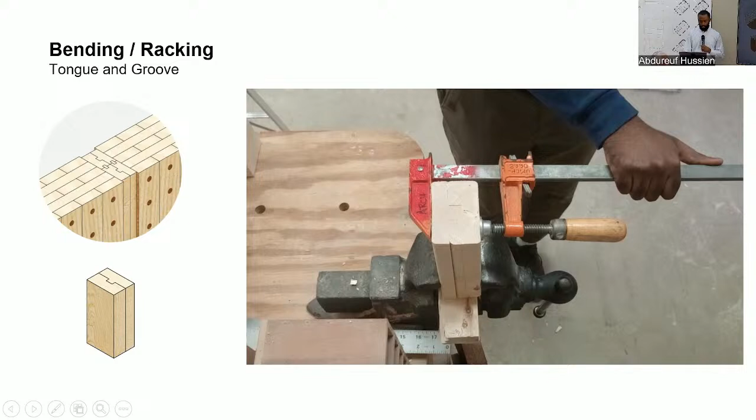When we compare this to the tongue and groove, the small profile of the tongue and groove, which is over here, that's its weakest point. So that's where it will start to buckle. And then its secondary point is over here. But it's important to note how quickly it buckles once that secondary point yields. So as that secondary point yields, it comes apart quite instantaneously. Okay, so as mentioned earlier, the small profile is its primary weak point, but once its secondary weak point gives, it gives out instantaneously.

Based on these tests, referring back to the moisture test where the single spline could perform comparatively to the tongue and groove, as well as the compression tests where we saw that it was distributing the forces towards the mass timber walls, as well as the bending and racking test where even after the cracks started to emerge, it held out for quite a while. Based on these, I picked the single spline joint for the assembly.

For the floor and roof panels, I used the same typology as the wall panels using the cross-stack dowel laminated timber. The difference here, for the floor panel, I used 5-ply. This is based on a study conducted by the Department of Housing where they looked at average dead and live loads for residential buildings. And they found that it was on average about 55 pounds per square foot for floors and then 35 for roofs. And so based on that, I used 3-ply for the roofs instead.

So these are also from the study with the U.S. Department of Agriculture and many organizations, including Woodworks, where they looked at different panel-to-panel connections for floors. So one of the ones that I came upon was the double surface spline for the 5-ply. These use plywood pieces, half an inch to an inch thick, depending on the need for the loads.

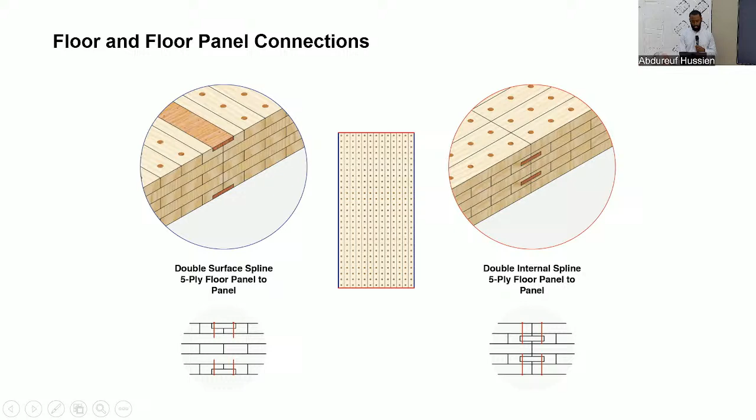So the double spline, the surface spline is applied for the longer profiles and the internal spline is applied for the smaller profiles. The same is used for the roof-to-roof connections, but instead using an internal spline for the smaller profiles.

The wall, roof, and floor connections, these are based on the index that was produced by Woodworks by using their network. They have a network including companies like RDH, which focus on building science, mainly in Northwest United States. And they look at different assembly types and different connections. And one of the simplest and one of the cheapest connections is using partially threaded screws. So these are used for the roof-to-wall connections, as well as the wall-to-floor using a wooden ledger instead of any steel.

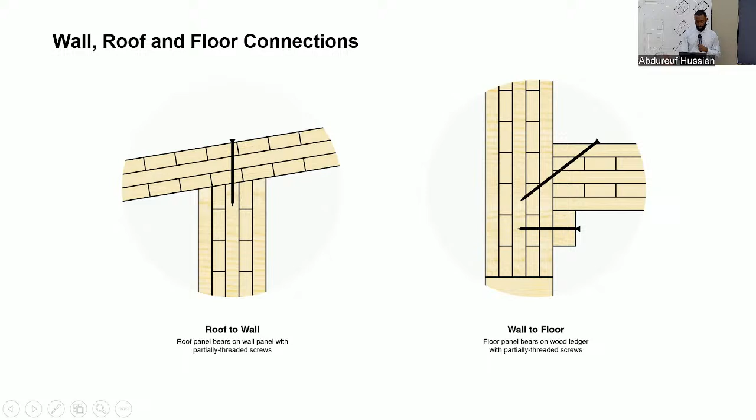And then for the foundation connections, both for the wall and floor, there's a pressure-treated sill that's anchored into a concrete foundation, and then is connected to the wall as well as the floor using partially threaded screws.

As I mentioned earlier, RDH is a building science company that is based in Portland, Oregon, and San Francisco, and they're part of the Woodworks network. And they developed the groundworks for developing wall assemblies. And so referencing some of the information they provide, I came upon this wall assembly, which uses the mass timber panels in addition to cork insulation as well as cedar for its weather-resistant qualities.

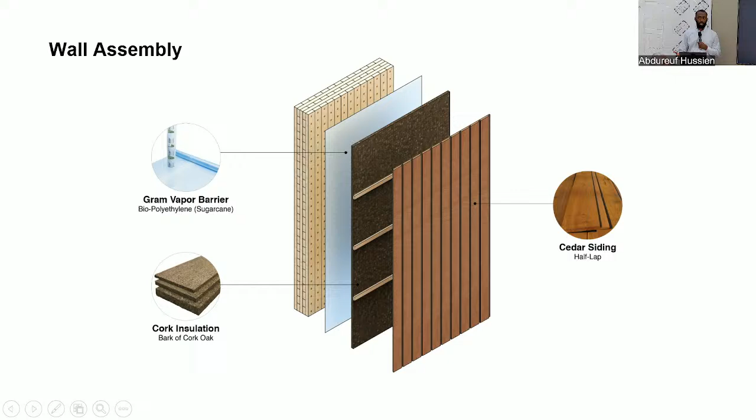But it uses biopolyethylene, which is an alternative to polyethylene. Instead of using petroleum, which is used to produce plastics, it uses sugarcane, in some cases corn, instead. The wall assembly is relatively simple. As I mentioned earlier, the mass timber is quite robust in terms of its R value, and so this is supplemented with the cork insulation, which is made from the bark of a cork oak tree.

The roof assembly also uses the Gram vapor barrier with cork insulation as well as cedar shingles. Unfortunately, there is also a requirement to use ice and water shield, which doesn't have a sustainable alternative at the moment. It's only found within a polyethylene, which is petroleum based, and it's an area that needs to be explored further. But the roof assembly alongside the wall and floor assembly, as well as the different connections, make up the kit of parts that we can work with to create different typologies.

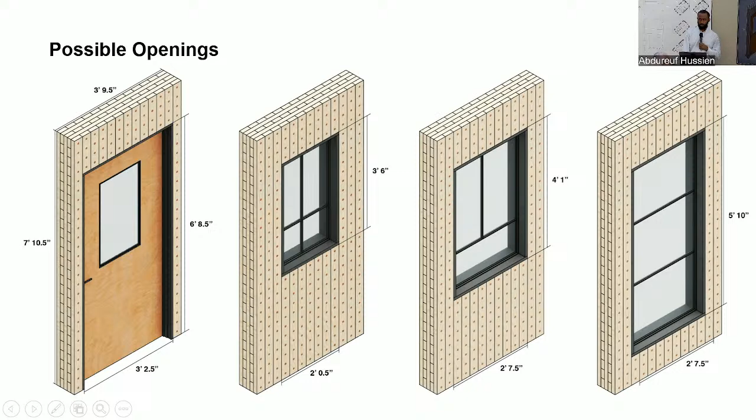We have the opportunity to explore different openings by using the increments of the mass timber, using the increments of the 2x4s. As I mentioned earlier, these are structurally robust, so we have the opportunity to explore different types of openings. We also have the opportunity to explore different typologies, such as a single-family home, which can be aggregated into communities to fully take advantage of the mass timber.

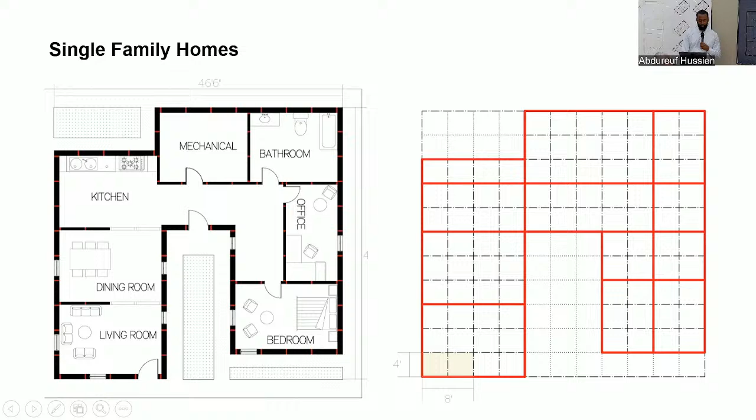The panel-to-panel connections, as well as the floor panel, determine the grid in which we can work in. As long as we work within this grid, we have the opportunity to test out different spatial organizations. In this case, using it to create a courtyard-style single-family home. And when these different kit of parts come together, the robustness of the timber panel becomes quite apparent, where it minimizes the need for insulation, and where there is insulation needed, we can integrate cork insulation, which is a far more sustainable alternative to foam insulation, and we're able to meet the requirements for Climate Zone 4.

Another assembly we can explore with this kit of parts are townhomes, which ask us the question of how we scale up, and we can explore that further.

In addition to the grid determining the partition walls, it can help us determine how we can align vertical loads across the different levels. And in addition to meeting the requirements for the climate zone, we can integrate this connection. This connection is also from the study conducted by Woodworks, where we use steel plates to transfer the vertical loads. And this starts to think about ways we can expand this further, and we can start thinking about scaling it into different typologies.

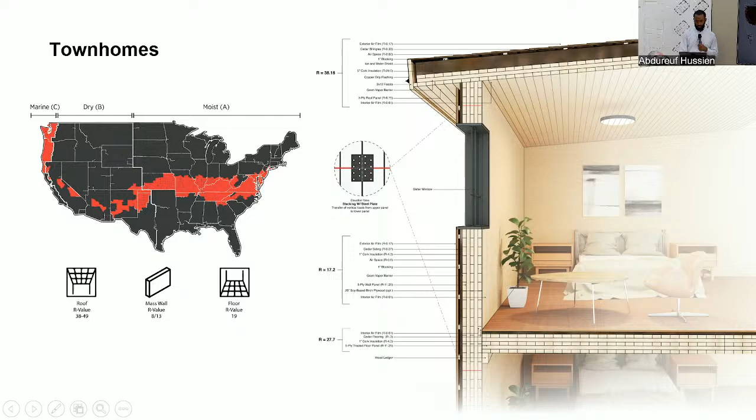These kit of parts are relatively straightforward, but robust when it comes to sustainability. And it gives us the opportunity to lay the groundwork and create numerous possibilities, numerous opportunities to create sustainable homes and communities across the US. Thank you.

Anyone want to start? Thank you.

This was really great, a great presentation, and I feel like I learned quite a bit from it, so thank you so much. Congratulations. Really thorough investigation. I like that you did the one-to-one mock-ups and the testing, really interesting to me. I have a couple questions about the structure. Can you tell me what the maximum openings can be? You have these possible door and window options, but I'm wondering how far can they span? These headers don't look totally conventional.

Yeah. So in terms of the span, it's determined by the ply, meaning if it is 3-ply or 5-ply. So is it for the headers of the doors? Yeah, so how big can you make an opening, or how wide can that window be? I might be one number off a little bit here, but for 5-ply, you can get up to 13 feet using mass timber. This was done by, again, Woodworks, I believe, within their network. So it all depends on the ply. For example, the door there has about 3-ply, so about 9 to 10. So it depends on the number of 2x4s. Okay, so the thickness of the assembly. Exactly, yeah.

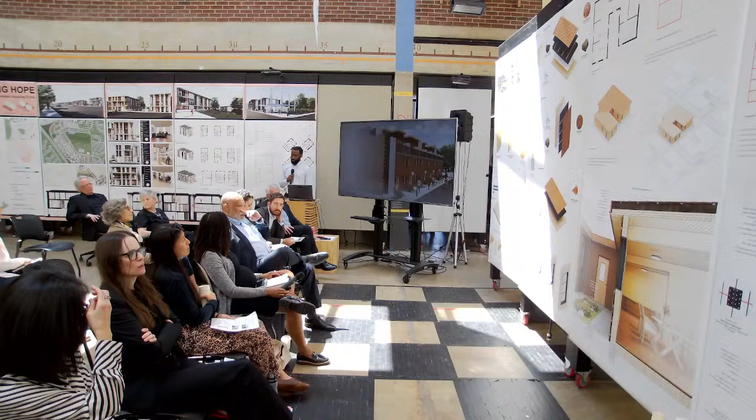Yeah. Yeah. Yeah. Thank you.

Yeah, the point I want to highlight is the one that you introduced, which is you've created a kit of parts, an assembly approach. And the thesis, I'm paraphrasing, is about what you can do with this. You're demonstrating a use case in two different examples, but you can do something else with it, right?

The foundation of moving forward with that system is predicated on understanding the likelihood of success and what can be done with it to develop other iterations. So really, the broad point I'm trying to make is, and I'm getting a little bit more information now from what Yanda said, you applied a system that's used in other climate zones, not in this country, to this climate zone.